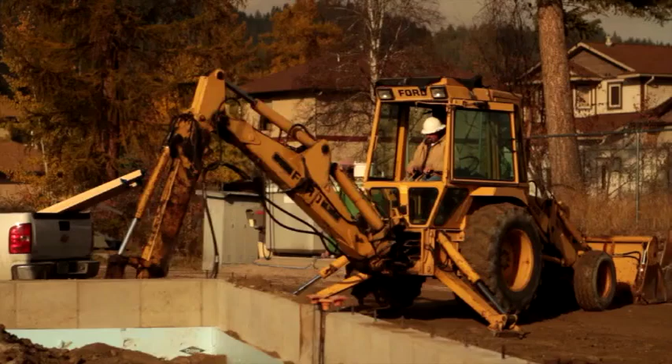Trenches and excavations are common at many construction sites and are considered one of the most dangerous construction operations. Digging a hole in the ground seems simple, but it is estimated that over 100 deaths per year occur due to cave-ins and other excavation hazards. Digging can be a major cause of concern unless you know proper techniques and the OSHA rules for excavation and trenching. Never dig until you know it is safe.

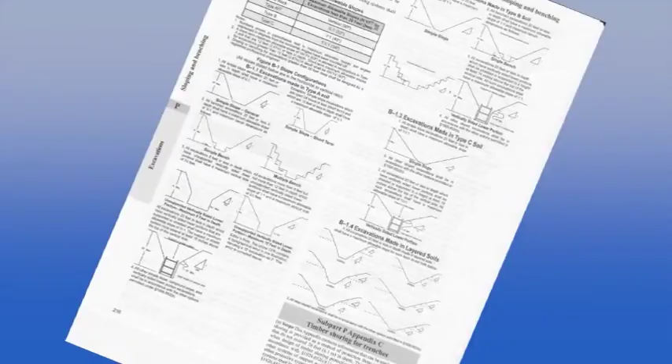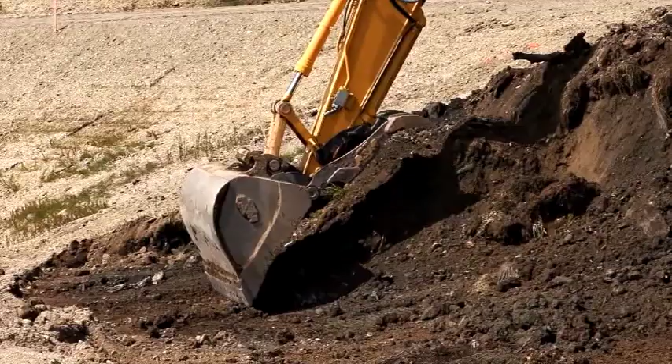This video will discuss the various aspects of excavation and trenching and will cover the following: OSHA requirements, hazards, working safely in and around excavations and trenches, general requirements, mobile equipment, and the competent person.

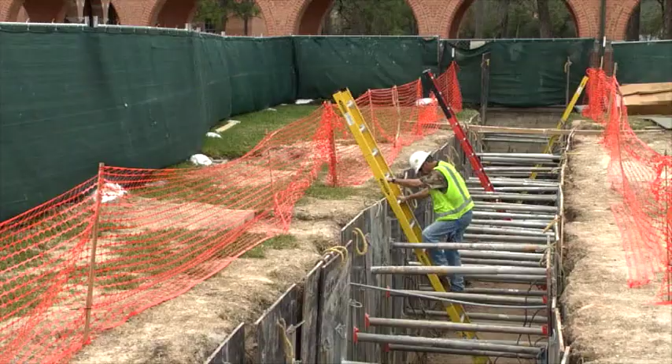OSHA Regulation 1926 Subpart P is the relevant standard for trenching and excavation work. This OSHA regulation applies to all open excavations made in the Earth's surface and requires workers in trenches and excavations be protected from the hazards that can occur in the operation. Prior to any excavation or trench work, the OSHA requirements should be reviewed and followed.

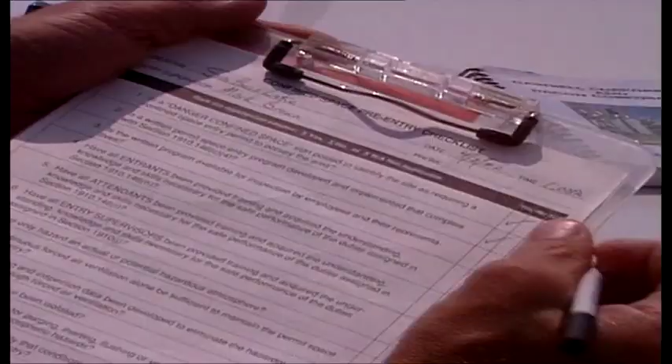Companies are responsible for knowing and following current federal, state, and local laws, implementing an effective health and safety program, and ensuring all affected employees work safe and follow rules and regulations.

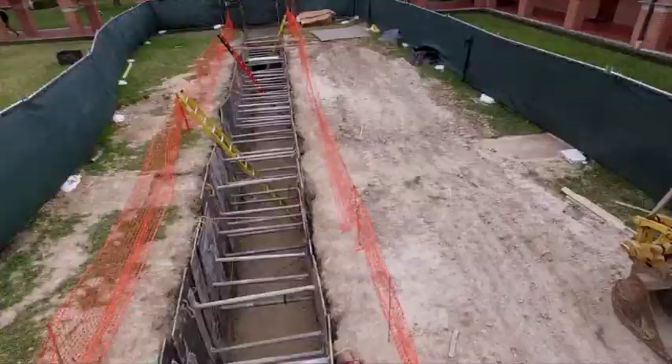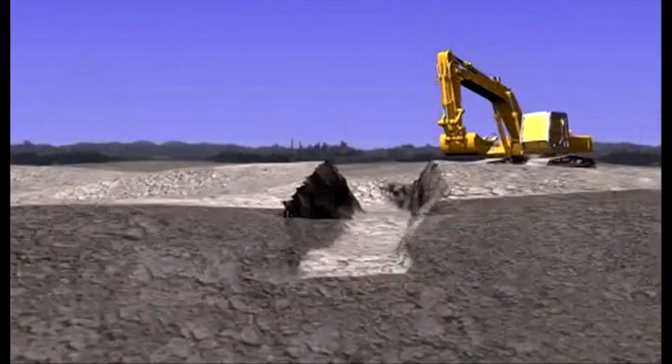By definition, a trench is considered an excavation, but there are differences between the two types of openings. An excavation is any man-made cut, cavity, trench, or depression in an earth surface formed by earth removal. A trench is described as a narrow excavation made below the ground that is deeper than it is wide. Trenches can be up to 15 feet wide.

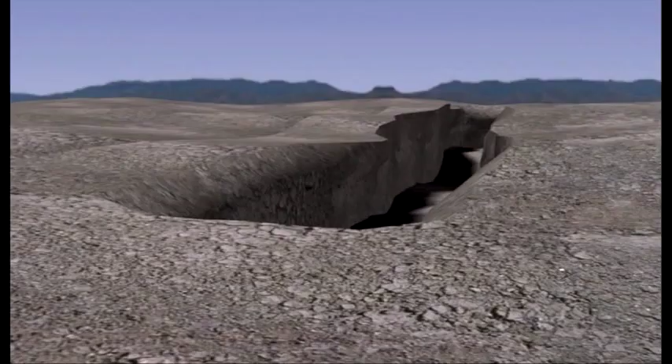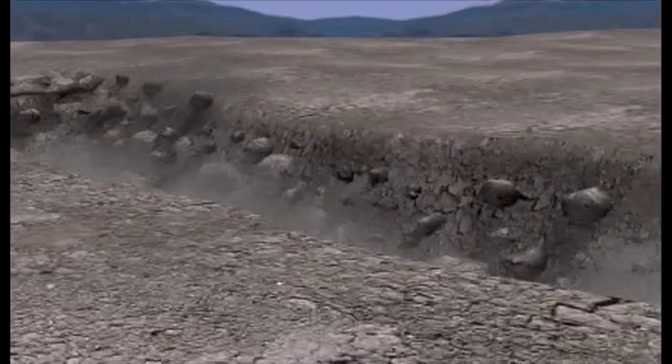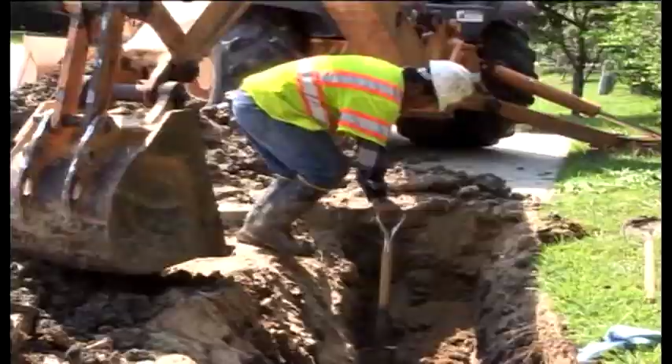The most feared of all the hazards is the possibility of a cave-in. All excavations are hazardous because they are inherently unstable. Workers can be seriously injured or killed if the sides of a trench collapse. Unsafe trenches are the major factor in many trenching hazards. Trenches don't have to be deep for accidents to occur. Serious injuries are also possible in shallow trenches that are less than 5 feet deep.

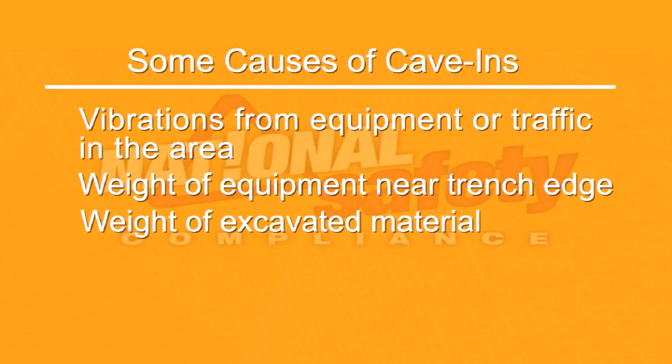A cubic yard of dirt can weigh up to 2,700 pounds and is capable of moving at 25 feet per second. A cave-in makes very little noise and gives very little warning prior to the collapse. Some causes of cave-ins include vibrations from equipment or traffic in the area, weight of equipment near the trench edge, weight of excavated material, referred to as spoil, too close to the trench edge, poor soil condition, and rain or water which weakens the trench walls. If more than one condition exists, then the risk of collapse increases.

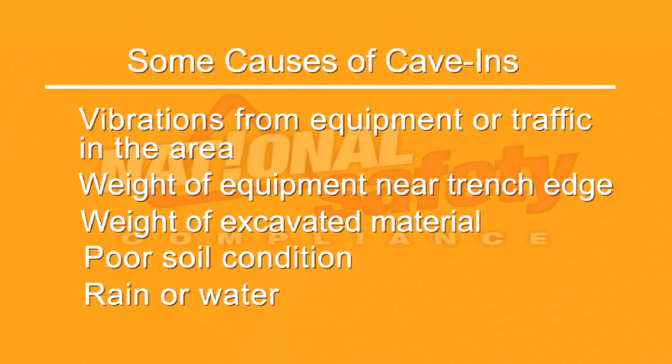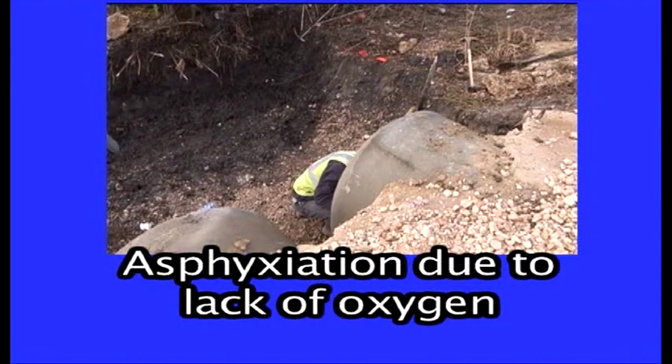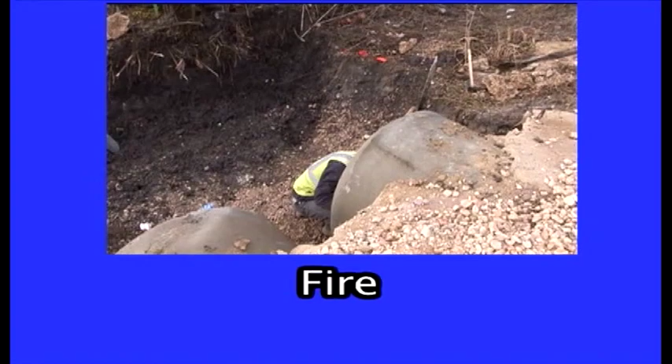Sometimes, excavations are considered to be confined spaces. Asphyxiation due to lack of oxygen in an excavation can occur. Inhalation of toxic fumes released during a dig is also possible. Drowning, electrocution, explosions, and fire are other possible hazards. And finally, when working near the trench, the risk of being hit by a vehicle exists, especially if you are near traffic.

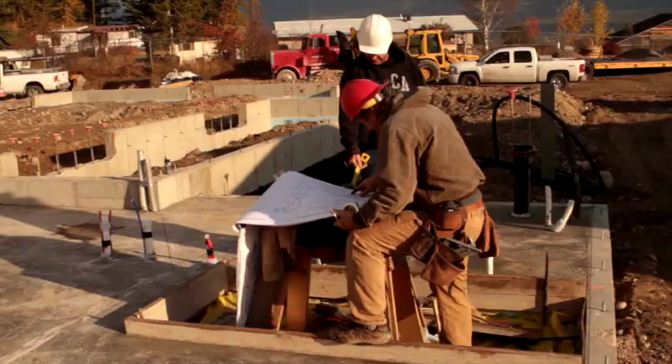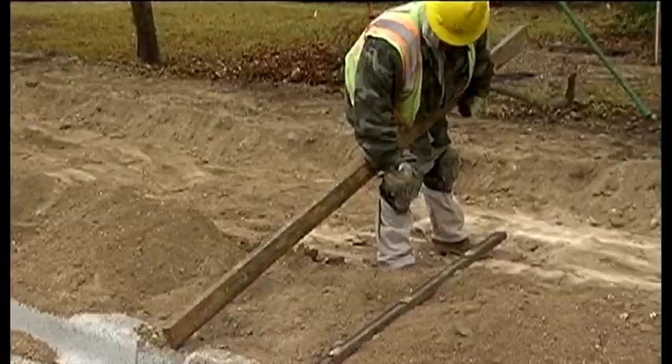Pre-job planning is vital to accident-free trenching. Safety cannot be improvised as work progresses. A key factor to safety includes performing a job site analysis and identifying hazards and possible hazards before work begins. Always take the appropriate measures to eliminate or reduce the risks of hazards. Any employee who is going to work in or near an excavation must be trained.

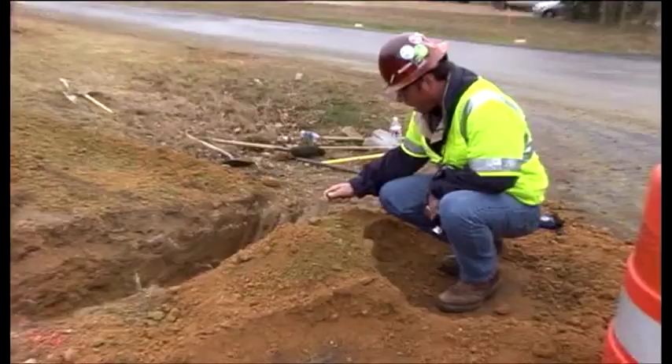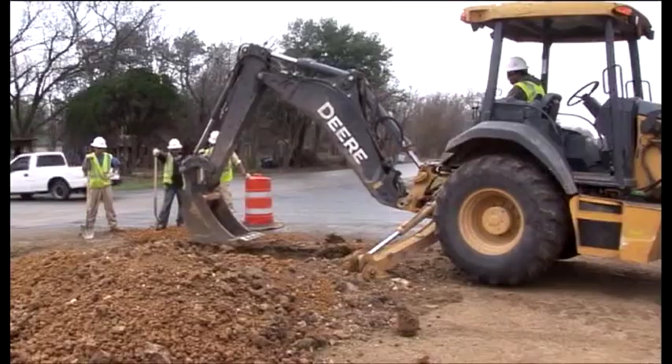A competent person must be on site at all times to oversee every aspect of excavating and trenching. On work sites, this person is generally the supervisor. A competent person is one who has training in soil analysis and in the use of proper protective systems. The competent person is knowledgeable about trenching and excavation standards, must be able to identify hazards and unsafe conditions, and must have the authority to stop work when unsafe conditions exist. The competent person requires a greater level of training and experience than a normal worker. Any trench or excavation that is 5 feet or more deep requires the use of a protective system.

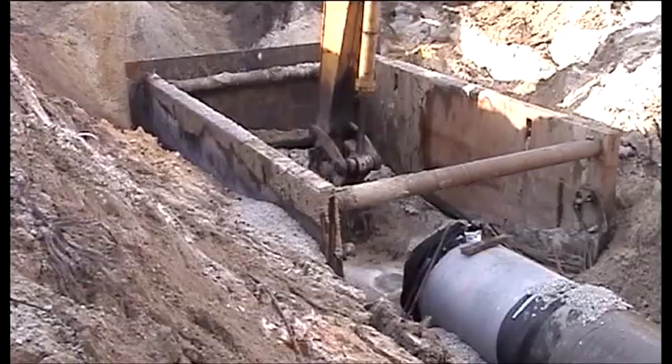Some contractors require the protective system to be in place in all excavations over 4 feet deep. If excavations are made entirely in stable rock or are less than 5 feet deep, and a competent person has determined that there is no potential for a cave-in, a protective system is not needed.

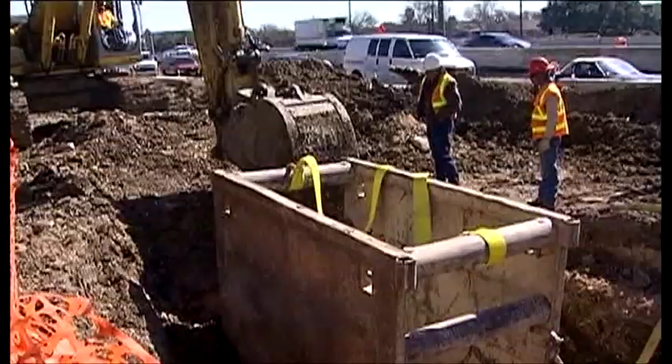Excavations and trenches deeper than 20 feet or below the base or footing of a foundation or wall require a protective system designed by a registered professional engineer. A protective system is a method of protecting workers from collapses of material that can fall or roll into an excavation or trench, or from the collapse of adjacent structures.

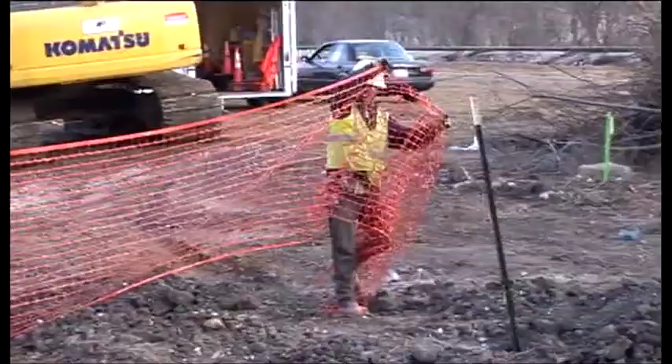Always finish excavation work as quickly as possible. Finally, it is imperative to barricade, protect, or cover an excavation or trench from anyone who may come close when workers are not present.

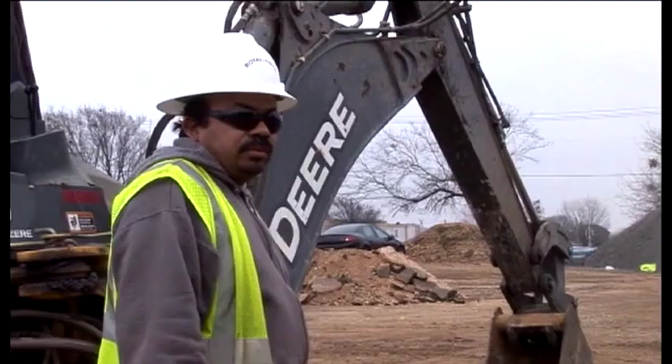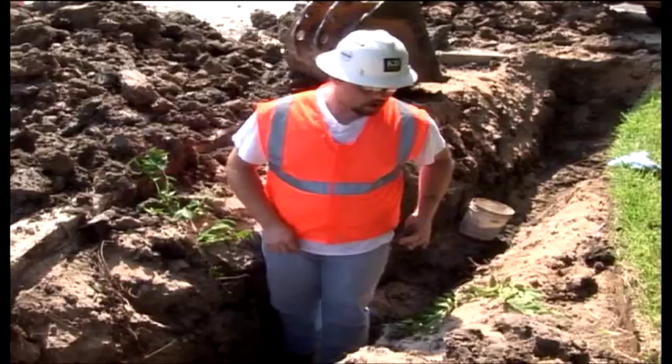Before digging, the competent person must evaluate the soil conditions. There are 4 types of soil classifications: stable rock, which is the most stable; Type A, which is considered very good; Type B, which is fair; and Type C, which is the least stable and is considered very poor. Soil classification is based on results of at least 1 visual and 1 manual analysis by the competent person.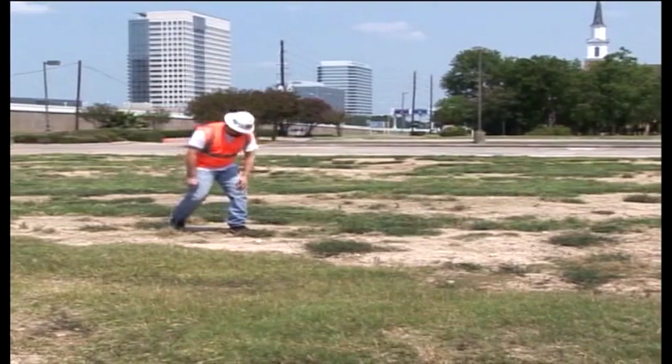In a visual test, the entire excavation site is observed, including the soil adjacent to the site and the soil being excavated. The evaluator also checks for any signs of vibration. It is common for the competent person to walk the entire site at least twice and observe the areas that will be excavated. A manual analysis consists of physically testing the soil and looking at different consistencies and attributes of the soil.

Common tests are a thumb penetration test, which involves pressing the thumb firmly into the soil. The thumb penetration test is the least accurate testing method. A dry strength test, which involves crumbling a sample of soil in your hand.

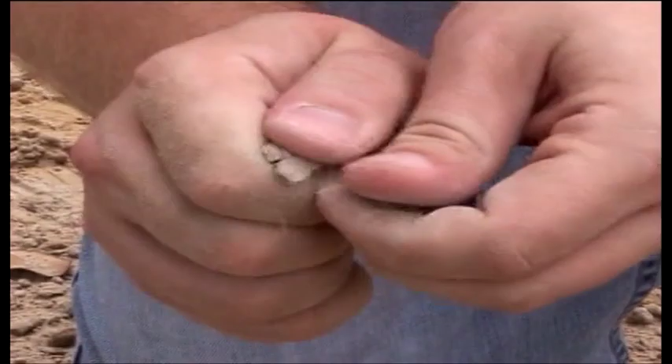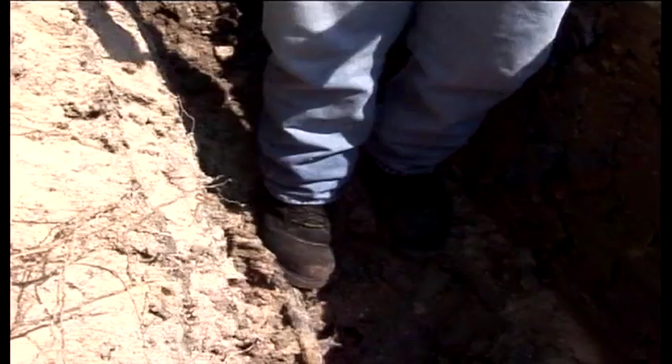A plasticity or wet thread test is when one attempts to mold a moist sample of soil into a thin thread approximately 1/8 of an inch in diameter by 2 inches in length. And finally, one can use a pocket penetrometer or hand-operated shear vane to determine the unconfined compression strength of soils.

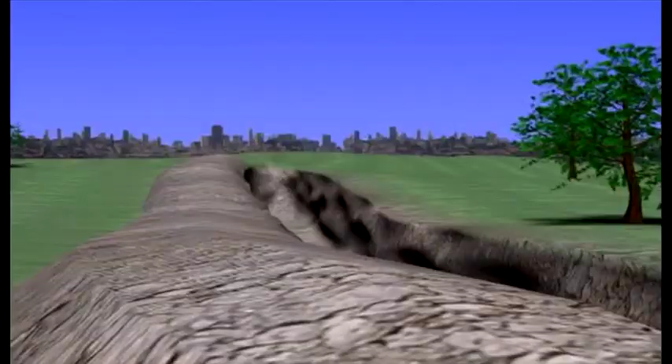Select and construct the appropriate protective systems in accordance with OSHA standards. The system used is based on soil classification. Protective systems include sloping, benching, and support systems including shoring and shielding. Sloping an excavation is when sides of an excavation are inclined away from the excavation so as to prevent cave-ins. The soil condition and the angle of repose determines the degree of slope required.

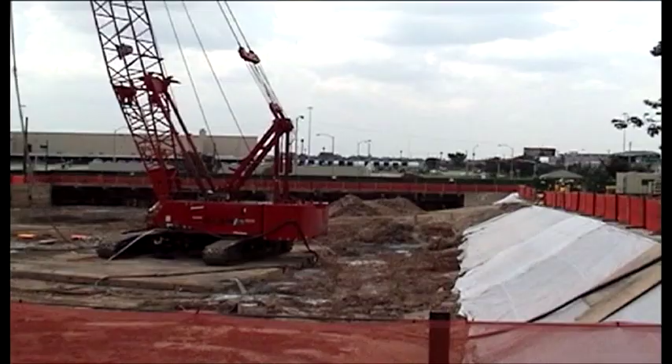Benching is a means of excavating the sides of an excavation to form one or a series of horizontal levels or steps, usually with vertical or near vertical surfaces between levels. If soil conditions warrant and the trench is more than 5 feet deep, a support system structure of underpinning, bracing, or shoring, which provides support to an adjacent structure, underground installation, or the sides of an excavation must be used.

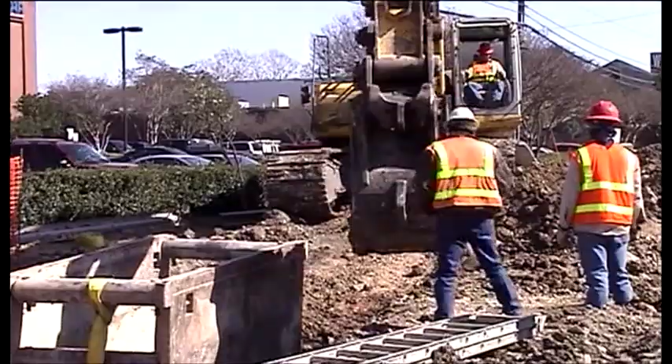2 types of support systems are commonly used. Shoring, which is the process of placing metal or wood panels inside a trench, against the soil walls, and securing them in place with bars and vices. Proper shoring prevents cave-ins. The second system is the use of shields. The shield system is a structure that is able to withstand the forces imposed on it by a cave-in. Shields used in trenches are usually referred to as trench boxes or trench shields.

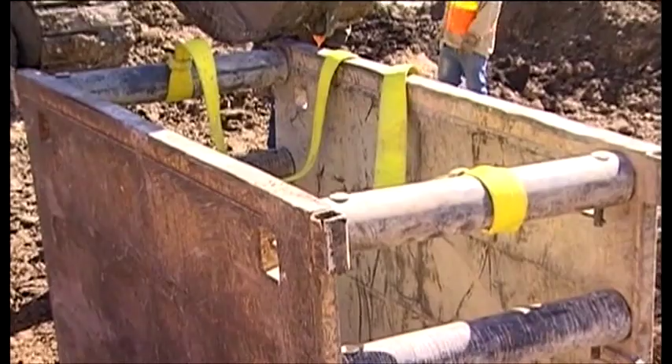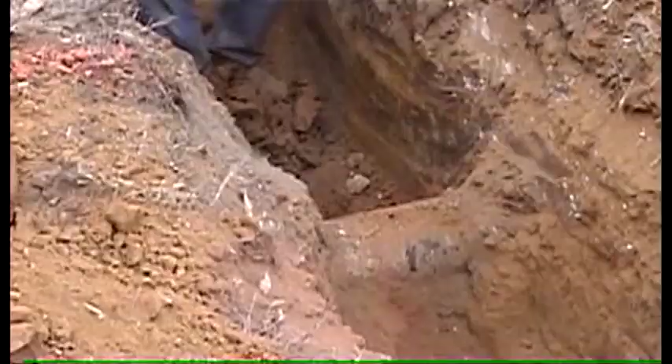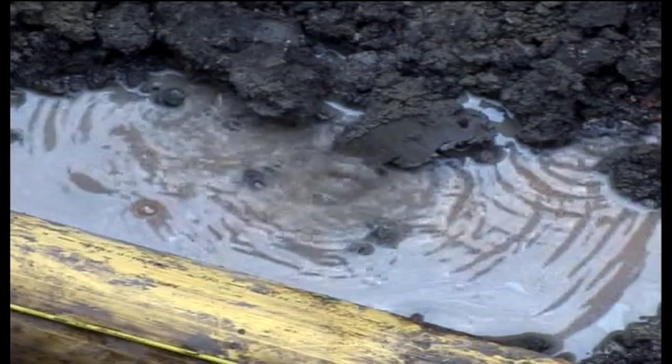Prior to digging, it is imperative that all underground utilities, such as gas, electric, phone, cable, water lines, etc., are located and marked. By calling the nationwide one-call number 811, various utility companies will send out representatives to locate the various utilities lines. While the excavation is open, any underground utility lines must be protected, supported, or removed as necessary. All necessary precautions must be taken to prevent damaging underground utilities. If an underground utility is damaged, notify the utility operator immediately.

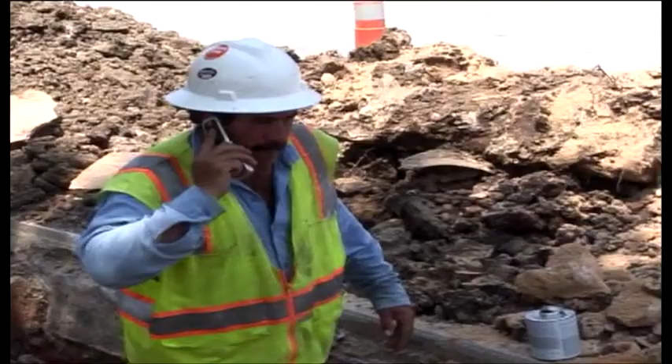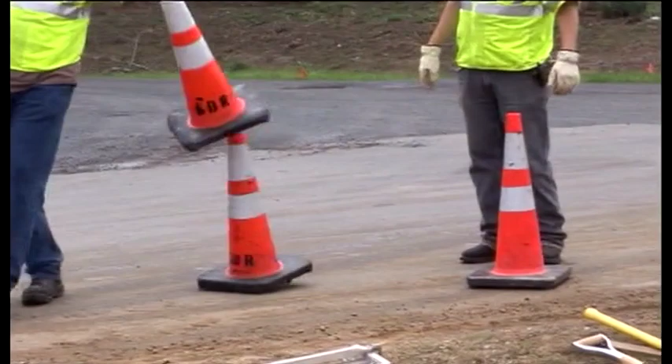If the damage results in the release of hazardous gases or liquids, both the utility operator and appropriate emergency response officials should be notified immediately. Call 911 if appropriate. Before starting to dig, plan and implement traffic control as necessary to protect workers and the excavation.

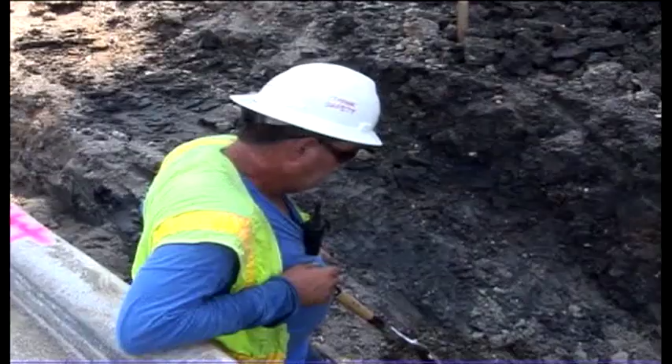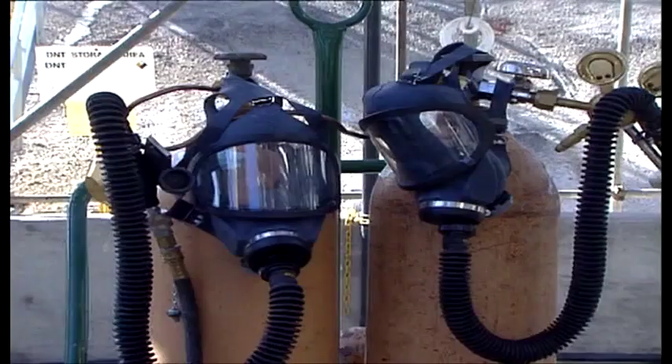Although it is not common, the exposure to harmful contaminants can cause problems for workers inside and around trenches. Workers must be protected from exposure to harmful levels of atmospheric contaminants, oxygen deficiency, hazardous fumes, and toxic gases. Ensure adequate ventilation in the trench or use proper respiratory protection if needed.

Always have on hand emergency rescue equipment when a hazardous atmosphere exists or can reasonably be expected to exist. This equipment includes breathing apparatus, safety harness and line, or a basket stretcher.

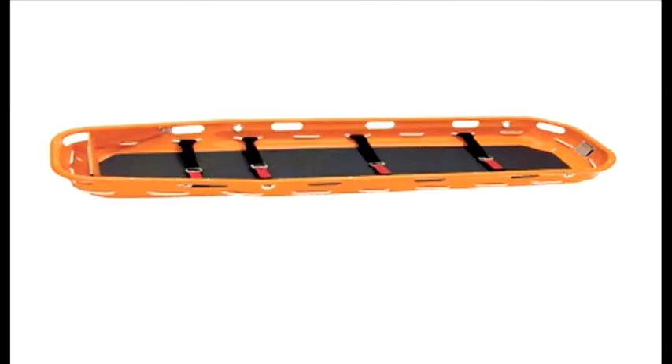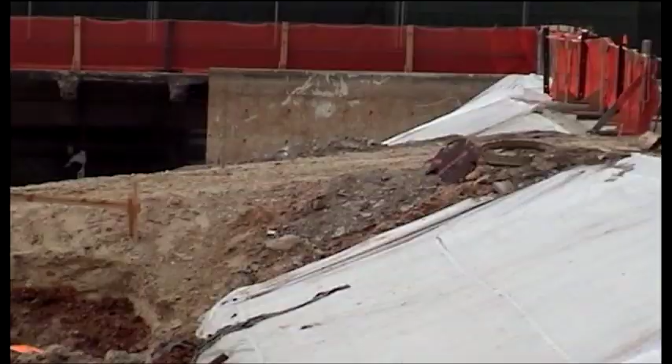Trenches deeper than 4 feet must have a means of entry and exit. This is usually provided for by a ladder. Ladders should extend 3 feet above the top of the excavation and be located within 25 feet of workers. Structural ramps that are used solely for access or egress from excavations must be designed by a competent person. Use ramps made from the earth as a means of egress only if a worker can walk on them in an upright position.

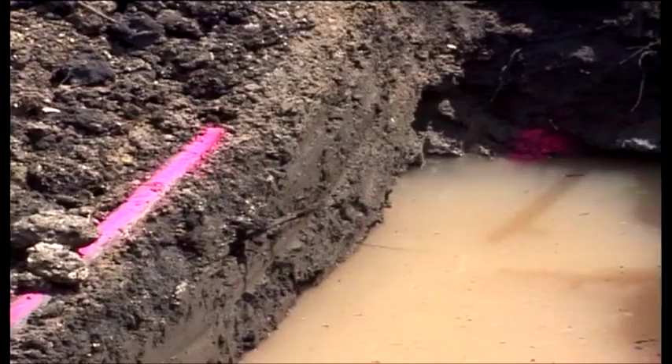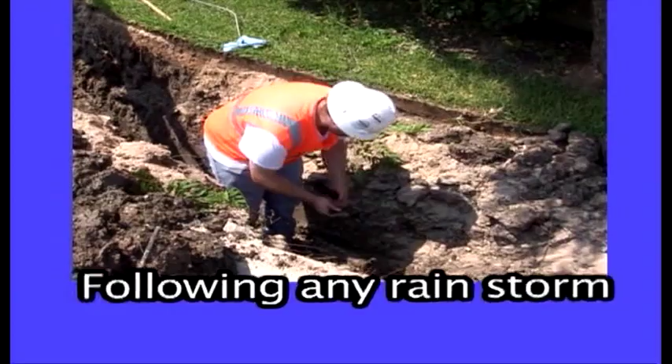If water accumulation is present or possible, use pumps or a drainage system. Never enter a trench that has water accumulated in it. Daily inspection is required by the competent person. This inspection should occur at the beginning of each shift, following any rainstorm, and after any change of condition that could compromise the trench. For example, the movement of any equipment along the edge of an excavation.

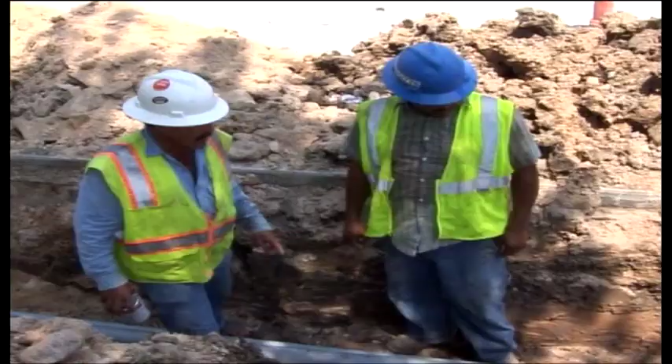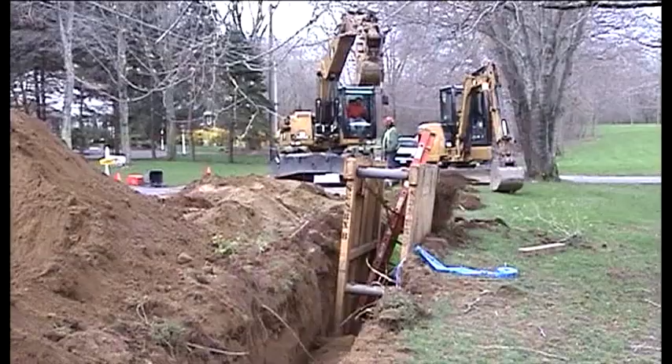Place spoil from the trench far enough away as not to cause a hazard. The weight of the spoil has been known to cause cave-ins. A competent person should direct the spoil's placement. The placement should be at least 2 feet away from the trench. If the worksite does not permit a 2-foot setback, then the spoils should temporarily be removed from the area. Use a retaining device, such as a trench box, which extends above the top of the trench to prevent spoils and equipment from falling back into the trench.

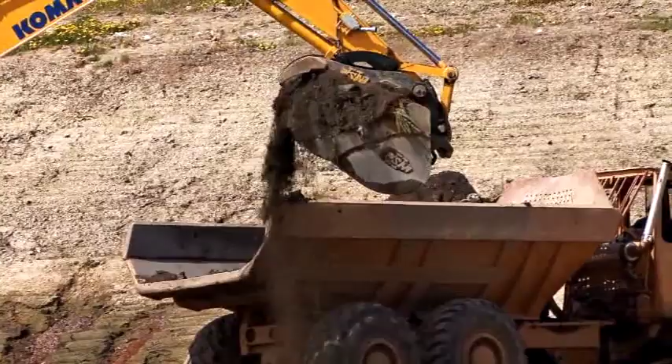Falling loads can also be a hazard for workers. Workers should never work or stand under loads that are being handled by lifting or digging equipment. Workers must stand away from a vehicle being loaded to avoid being struck by falling materials or spillage. All workers on an excavation site must wear hard hats. Safety glasses and steel-toed work shoes are also recommended.

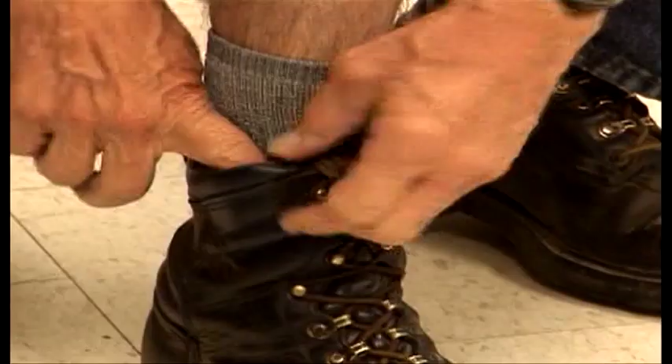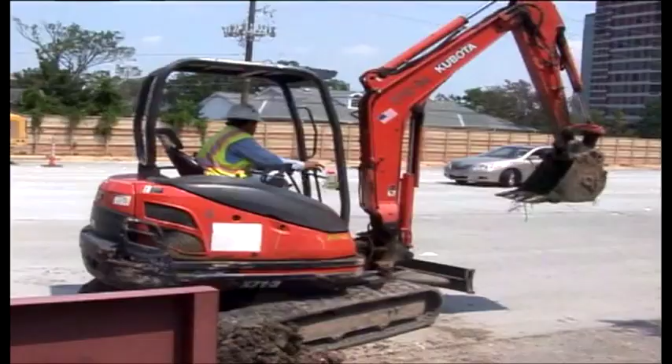While loading with equipment such as backhoes or dump trucks, an operator may remain in the cab as long as the equipment is properly equipped with a cab shield or adequate canopy. Mobile equipment should have a warning device, such as a backup alarm. Steps should also be taken to protect equipment from falling into excavations by installing barricades and using stop logs.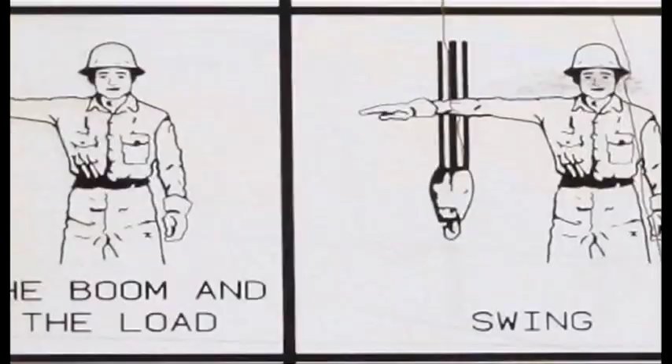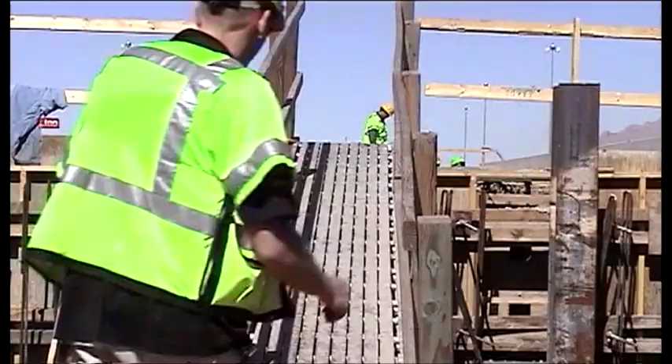The use of hand or mechanical signals only works when everyone on the site is familiar with the signals and knows what they mean. Crossing a trench on its surface should be discouraged. If trenches must be crossed, appropriate walkways or bridges with guardrails must be provided.

In the event of an accident, follow all safety procedures. Alert the competent person, appropriate emergency response personnel, necessary utility companies, and others according to your company policy. Never attempt to rescue a fellow worker during a cave-in. A second cave-in is very likely. Leave all rescues to trained rescue personnel.

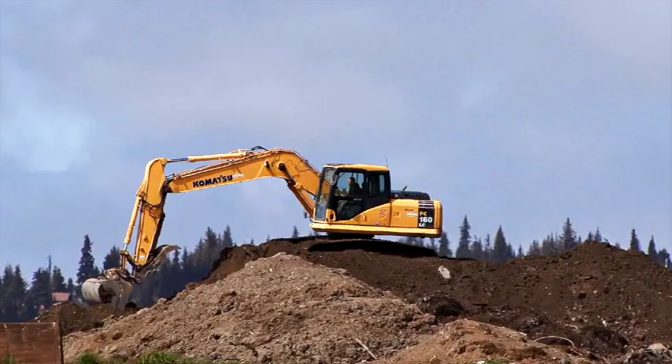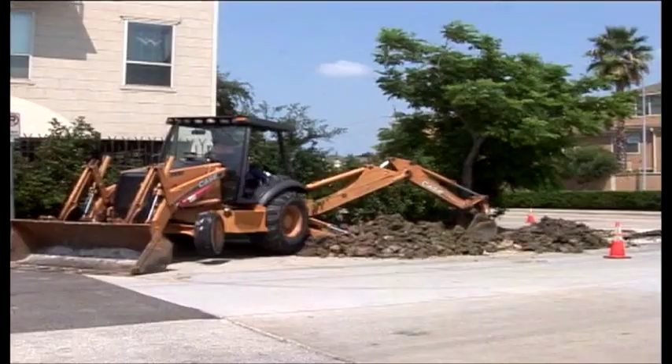This video has discussed many aspects of trenching and excavating. Remember to follow all safety rules. If a situation seems unsafe, alert the competent person and stop work until it is safe to continue. Never take shortcuts or try to skip necessary safety procedures. Finish excavation work as quickly as possible in a safe manner. Remember, you are the one working in the trench or excavation. It is your life that may be at risk.